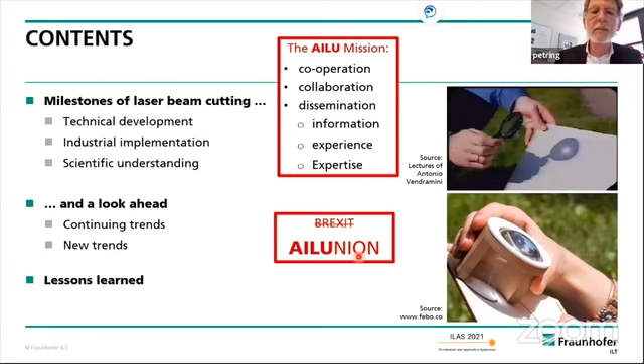Regarding the trends, we have some not so nice trends recently. I would say in the laser community we should make it different than politics - we should join perhaps under something one could call AILUnion, because it all starts in Great Britain or United Kingdom, as we will say later.

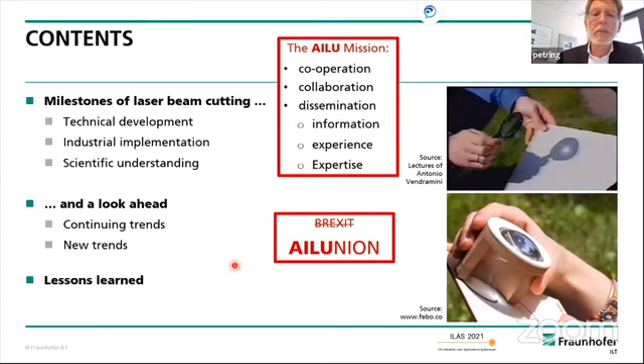Peter Houldcroft from TWI and Arthur Sullivan invented something in 1967. I was very sorry when I read in the AILU magazine last autumn that Peter passed away in August. I was very impressed by what Paul Hilton wrote in that magazine about the life, work, and achievements of Peter - really impressive. Let's think about him for a very short time at least.

His work was fundamental because he was the first to install a system which can cut metal sheets using oxygen as the assist gas and using the exothermal reaction of this process as an additional heat source. We will not go through the parameters here. What is quite funny is that at that time there were no zinc selenide optics - this was all made from potassium chloride, the lens as well as the protective window of the nozzle to build up the pressure.

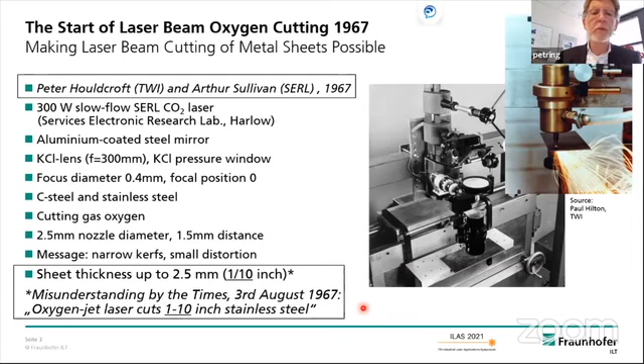Funny story behind it - the sheet thickness was up to 2.5 millimeters, which is 1/10 of an inch. The Times, a UK newspaper, wrote that oxygen laser cuts 1 to 10 inch stainless steel, simply moving the decimal point into the horizontal. So always be careful with messages in newspapers, whether about laser or the royal family.

These are my motivators, I call them. I could also say my private hall of fame of laser cutting. Of course, again, a lot of people are missing here, but for me personally, these were the people who motivated me when I started in '86 with laser material processing to look at the cutting process in more detail.

Of course, Peter already mentioned very fundamental work. A little bit more than 10 years later, Yoshiaki Arata investigated the process in Japan, and he found one of the first cutting models, the so-called Arata effect, as we laser cutters call it: during laser cutting with oxygen, the burning front can leave the laser zone, the burning process diminishes, the laser catches up again and heats up again to ignition temperature, and the burning process starts again. This cycle was recognized by Arata and also visualized in some of the first high-speed videos of this process. Very impressive and still valid.

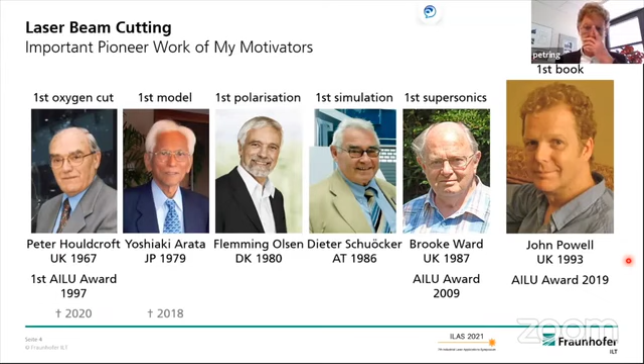Now we get a little bit more serious again, or more straightforward. Let's look first at the automotive implementations a little bit, in three slides.

During these early years, as far as I know, the first automotive application of laser cutting thin sheets was at Ford in Cologne. If somebody has an earlier example, please send it to me so I can update my list of dates and companies. In 1974, Ford started cutting prototypes and small batches with a Messer-Griesheim system, shown on the right picture, already using flying optics. Others followed, of course—for example BMW in Munich in 1980, already with a little bit higher power, 600 watts, and again at these times a Messer-Griesheim system.

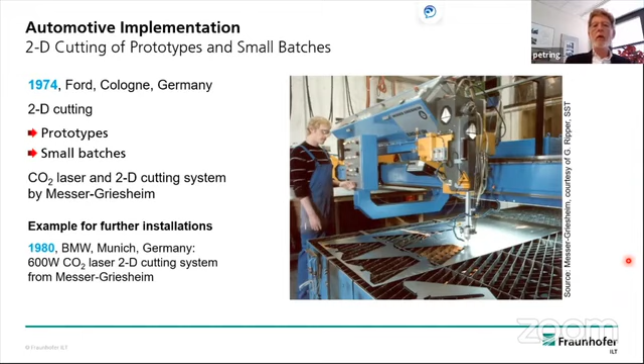We make a big jump to the late 80s when Renault, shown here on the left side, started with 3D cutting in the body shop. This was the first serial production application in the automotive industry, used for customizing. This was the early 3D application of laser cutting at automotive OEMs, because option holes for different variants of the cars could be made very flexibly with a laser system. For example, in the Renault, it was the rear window wiper mounting holes—some cars do not have a rear window wiper—the body side light holes for special lights, and the seatbelt mounting holes in the car.

These are examples about customizing products with flexible laser technology.

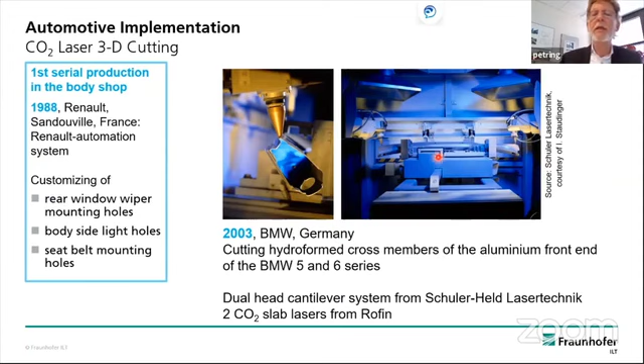Meanwhile, laser is a standard tool also in automotive industry, mainly for welding, but also for cutting. One example from 2003 is an interesting application at BMW, where the hydroformed cross members of the aluminum front end are cut for the BMW 5 and 6 series, starting in 2003. This is a 2-head cantilever system, a very special design from Schuler-Held, equipped with 2 slab lasers, the CO2 lasers in the market at that time with the highest beam quality, nearly diffraction limited and M square 1.

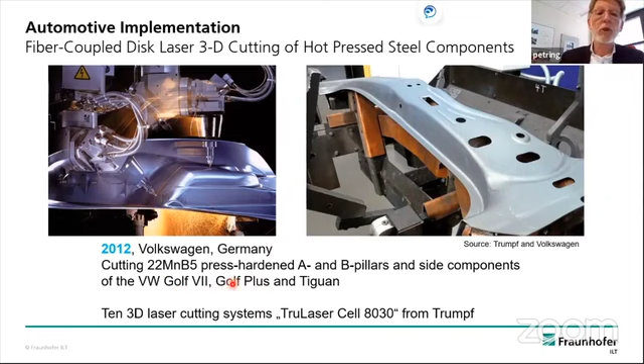Right now, without laser, we would not have these high strength steels in the car. Or to say it another way, they would be much more expensive, because hot pressed steel components, used for B pillars, A pillars, and other structural parts of cars, have very high strength and ductility and good crash behavior. On the other hand, they cannot be cut very economically with conventional mechanical tools by punching. So laser is the best choice, and this started in very high numbers, latest in 2012 at Volkswagen, with the first installation having already 10 3D systems, in that case from Trumpf, to cut the A, B pillar and side components of the Golf, different Golf versions, and the Tiguan SUV.

So this was a short, quick walk through the automotive development of laser cutting. Of course, there's a little bit more behind all this. So we come back to the basics.

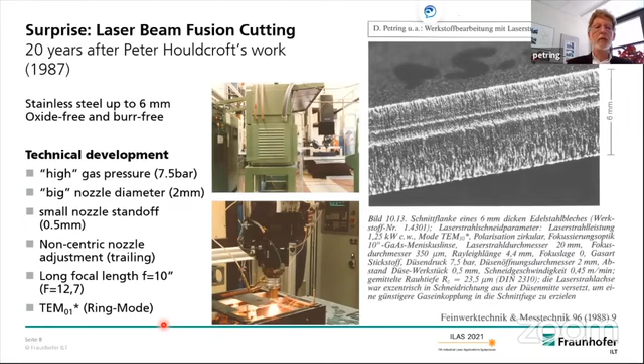So we were lucky to have this beam distribution already at those times to profit from the more stable process. What was really important for us regarding development was not only understanding the laser workpiece interaction, but also understanding the contribution of the gas jet, the properties, the specification of the gas jet, and this means the gas jet in the kerf. How does it behave? So we simply continued the work of Brooke Ward, but in this case not only looking above the sheet or in the free jet, but also into the kerf through simulated kerf channels. By this we could study the supersonic effects, shock waves, compression and expansion waves reflected in the kerf, boundary layer separation, and things like that. We could study the parameter dependencies of this flow behavior to optimize nozzle design and other gas parameters.

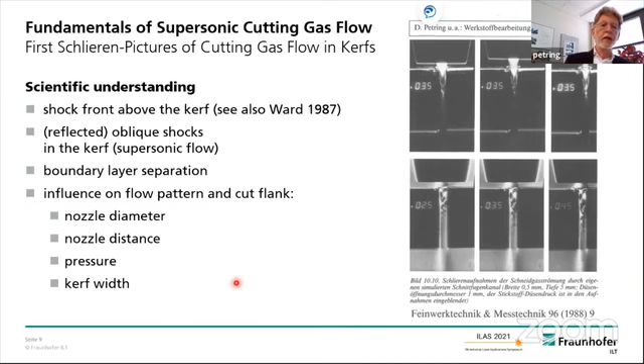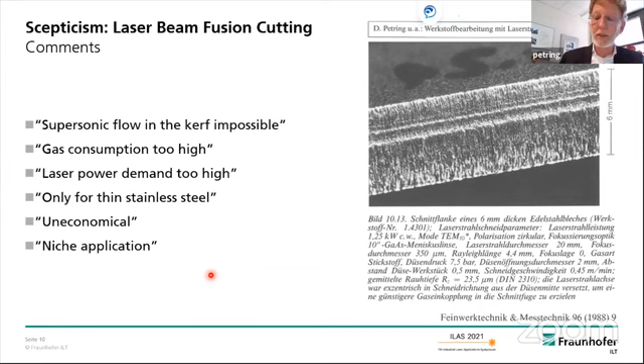The funny, or for us quite strenuous, thing was that there was a lot of skepticism in those days about laser beam fusion cutting. So these are some citations, some comments of the skeptics. Supersonic flow in the kerf is impossible. We really got this message from flow experts at universities. They assumed you have a perpendicular shock above the sheet, but it is an inclined shock, what we saw in the picture also. Gas consumption is too high, laser power demand is much too high, only for thin stainless steel. If for any steel, it's uneconomical and will always be a niche application, if any. These were the words from the experts outside of our laboratory.

So nevertheless, we continued because we found partners, especially Thyssen in those days, doing projects with us in the 90s regarding thick sheet cutting with nitrogen and also high-speed cutting with nitrogen.

And of course, we continued to deal with all the basics of the cutting gas and the physical interaction, and also looking at the metallography, because the steel supplier, Thyssen, was interested. What about the corrosion resistance? What about the hardness of these cuts compared to conventional cutting processes, plasma or mechanical cutting?

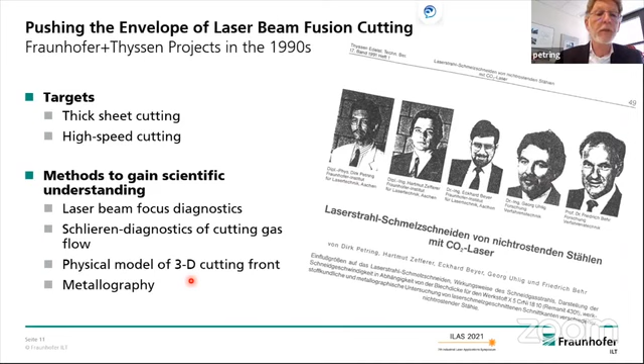And the laser was the winner. So after more refinement of all these things, we were lucky to support the first industrial installation of this kind of high power system. It was at that time a 6 kilowatt CO2 laser system cutting up to 18 millimeters, starting in 1993 at the Thyssen company. Later, structural steel was also cut at a shipyard in Germany, since the year 2000.

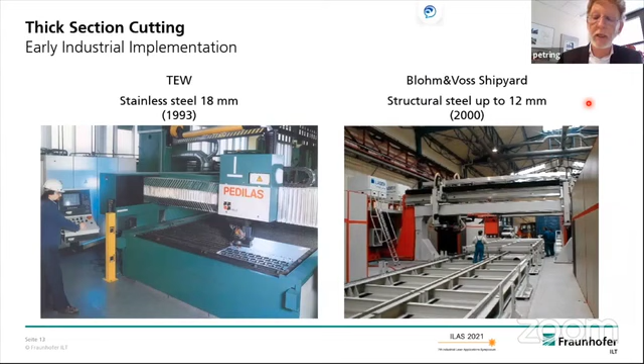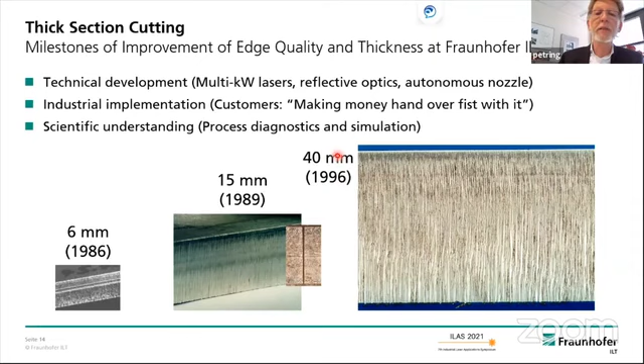So there were some first implementations, but the big success story of the oxide-free cutting of stainless steel started a little bit later. Nevertheless, a short list to see how things developed: 6 millimeters in '86, 15 in '89, and in '96 for the ITER project, 40 millimeters, being at that time still a laboratory result.

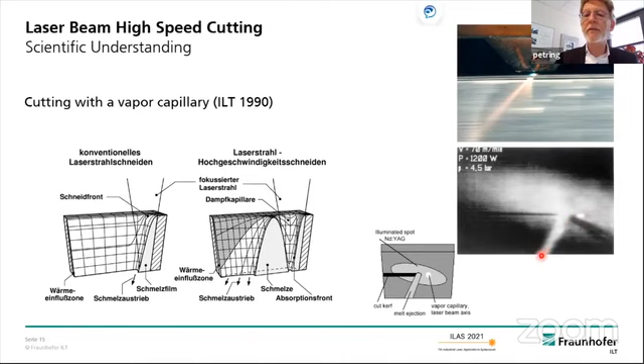Let's switch quickly to high-speed cutting. This was always a topic for us since the beginning, and one special application was the slitting of electrical steel. What we found fundamentally was that increasing the intensity of the laser beam, and with it the possible speed, the process changes from a simple cutting front to some kind of vapor capillary, driven by the melt like in a welding capillary, around the laser and then blown out. You see here from the bottom, the high-speed video image: here the exit of the capillary, and here the melt behind that, ejected out of the kerf.

We did a lot of work again together with Thyssen. We built up a slitting line with 8 lasers even. We also tested neodym-YAG lasers already in '96, achieving the same speed but with double the power. Perhaps astonishing, or not so well known: Peter Leibinger was at that time a student in my group, and he wrote his student's thesis on this topic.

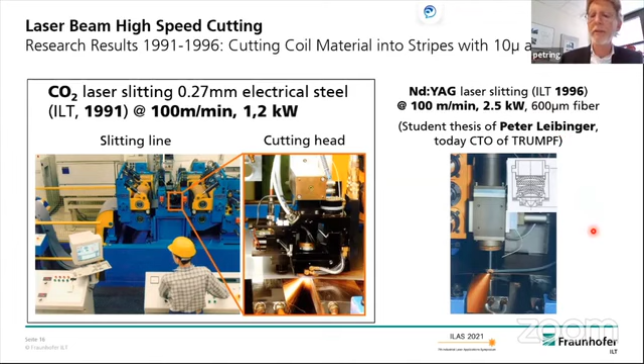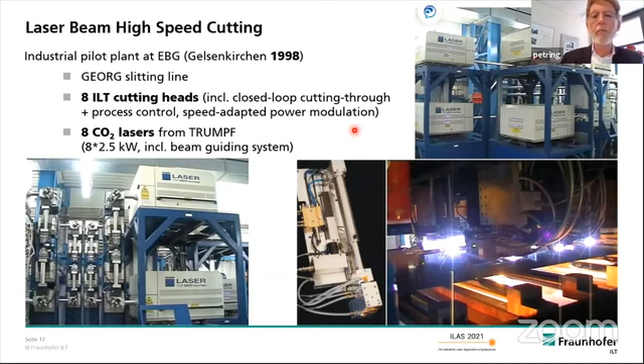A big machine with 8 CO2 lasers was built up as a pilot line. And if you see this beam guiding system and compare it with the possibilities of fiber lasers today, you see the big difference from that time to what we have today.

Process development continued, and we also moved to the fiber laser, calculating the possible limits and nearly reaching the physical limits. Of course, you never reach it completely because some parameter is always a little bit down, perhaps 5% or so, and the model and simulation are not perfect. It's still an approximation, but it works quite well to show us the target we have to achieve. Otherwise we would never have achieved it, because in empirical investigations you find a high speed and say, oh, that's it, without knowing the real limit.

Finally, we developed a process for Honda for their first laser blanking line in Japan, where today they cut 18,700 parts per day. The installation was in 2013, and this is a quite impressive machine with a 10G moving system, meaning a very high dynamic process.

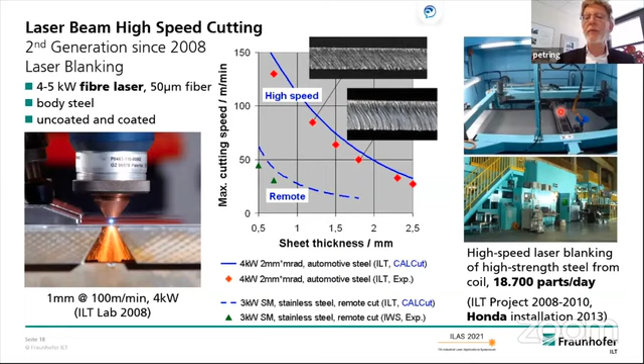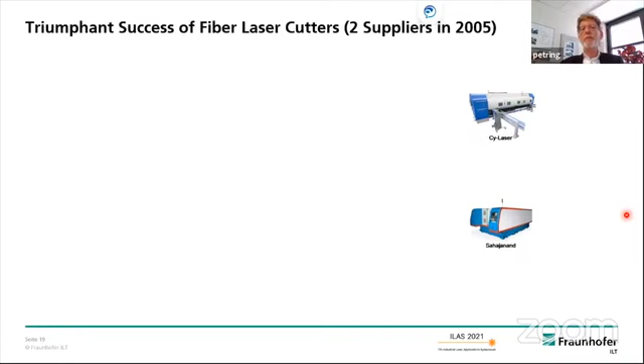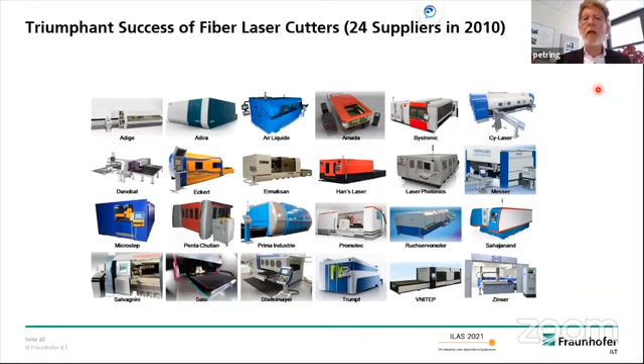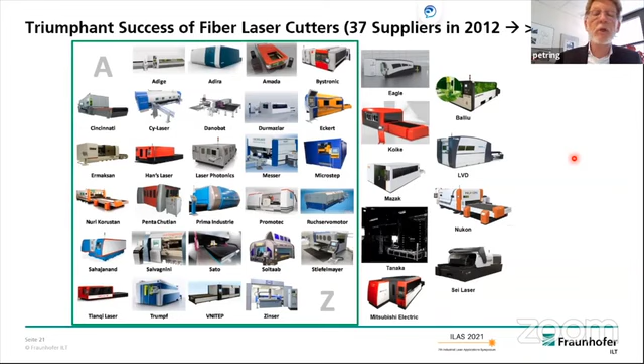Cutting during the running coil, of course. Short note on the laser sources: very quickly, we had 2 laser sources in 2005, 2 fiber laser cutting systems, one Italian and one Indian. Some years later we already had many more, and it continued growing. In 2013 I stopped tracking this market because too many systems and system suppliers were already on the market. Today we have perhaps 100 or so, especially in China, but also worldwide, as a lot of people want to share and profit from this process.

It is still making 40% of the whole industrial laser revenues, so it's still quite attractive and there's still something to do. Of course, you know all about this battle regarding improvement of fiber laser cutting. By the way, already in 2003, with enough power and the right focusing conditions, the quality was not so bad, at least in 10 millimeter stainless steel.

Meanwhile, however, there are so many intelligent solutions to form the beam. I call it here the Lords of the Rings, because most people believe the ring is the best. The ring is one example, and it's the best for certain cutting applications, for sure, but not always. This is why today the beam shaping is variable and can be switched. Unfortunately, we have no time to go through these in detail. Very intelligent patterns, a big amount of patents, and still growing, regarding beam shaping, not only for cutting but also for welding and other processes.

Still new possibilities, and yeah, we also work in this field since many years, and have partly even solutions with spherical optics in the right combination to avoid the adjustment sensitivity of aspherical optics.

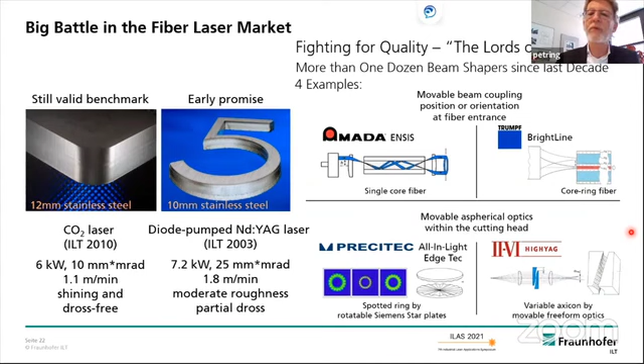The latest technical innovations, to mention only four from 2017 to 2020. Of course, I call it the touchdown nozzle of TRUMPF, allowing closed contact of the nozzle during cutting, which significantly, dramatically improves the efficiency of the gas jet. You can reduce the gas pressure and nevertheless have excellent cut quality. This kind of idea is quite old, but the competition is hard, and meanwhile these kinds of ideas find excellent technical solutions and utilization in the market.

Another example is the active speed control of TRUMPF, with a video camera observing the process through the kerf. This works at thicknesses above 4mm, not at high speeds in the thin section range, but very well in the case of cutting rusty sheets, predicting when to slow down the speed to avoid reduced quality.

Another very famous example is the Ventis of Amada, first installed in Europe in 2019, with the wobble technology, which offers a lot of new insight and new methods, and perhaps patented patterns to improve certain cutting processes.

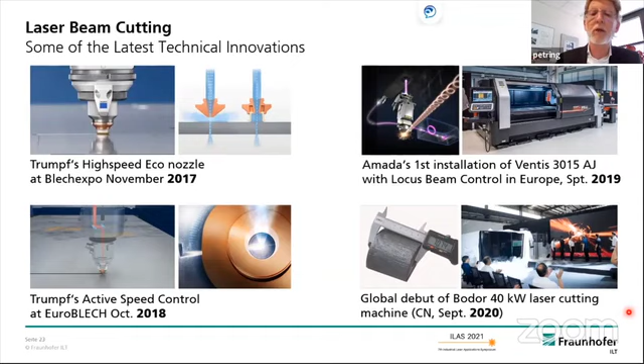I spoke already about the market. Some short words about what we plan right now, or where we're still working on: beam shaping rules, not only beam shaping tests, but understanding the rules of why a particular beam shape is the best.

We found out that acoustic resonances in the kerf can improve the quality, and our plan is to amplify these resonances. Of course, we utilize, or plan to utilize, machine learning and inference engines. We are still learning in it, but we're starting quite big projects in that field right now to close the loop and find closed loop controls for higher automation in laser cutting.

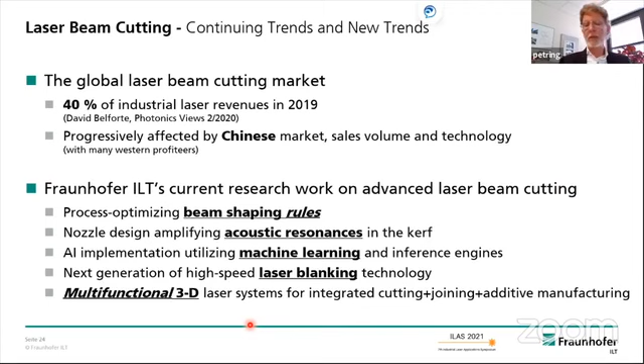Laser blanking is still seeing developments, with more lasers in one machine and multifunctional processing, combining flexibility not only in one process but in more. I skipped the lessons learned, you can read it later on. Thank you for your attention.

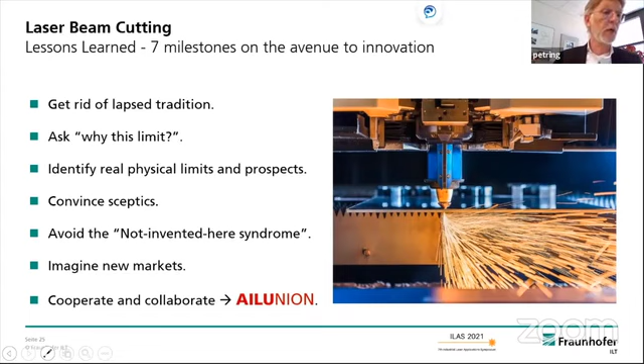I hope I'm still online, because I do not see the technical support. But it's my fault. I switch now to... here we are. Okay, now I see it again.